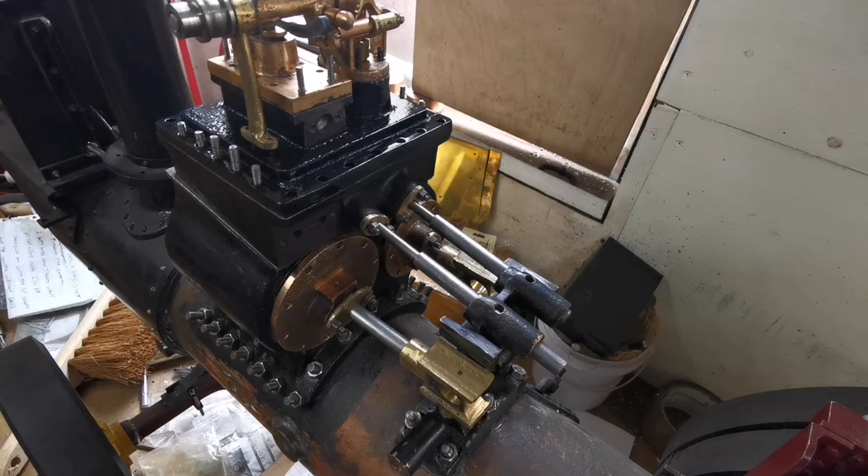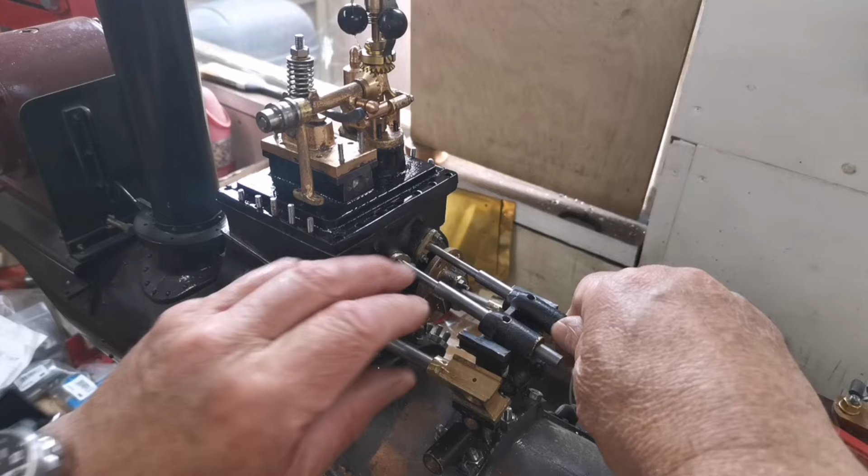Right, what I'm going to do now is make the proper valve rods. These I use to jig the weigh shaft bracket up with. So now I'll show you the drawing and then we'll see what we can do.

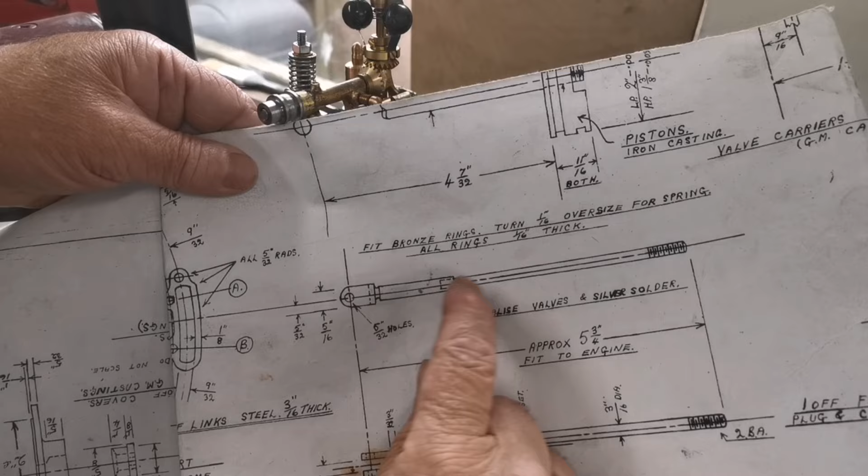Right, here's the valve rod. So what I've got is some 3/8 by 3/4, and I can make that in one piece, so there's no silver solder in there, because otherwise you've got a little bit of silver solder to join the 3/16 rod in the end of that.

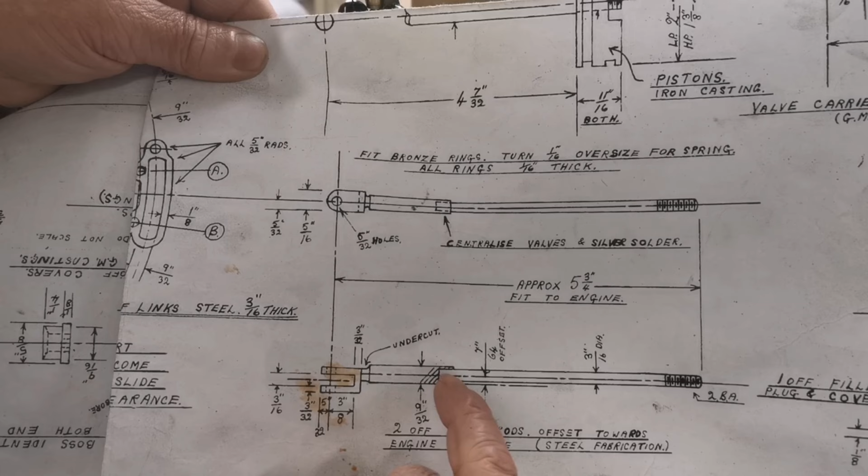So I've got to turn, I'll centre up, put my 4-jaw chuck in, centre up. I've already worked it out - if I centre up the 3/4 by 3/8 in the lathe, I can turn that 9/32 down to the right length, then cut it off, and then do that in the milling machine. So let's get going.

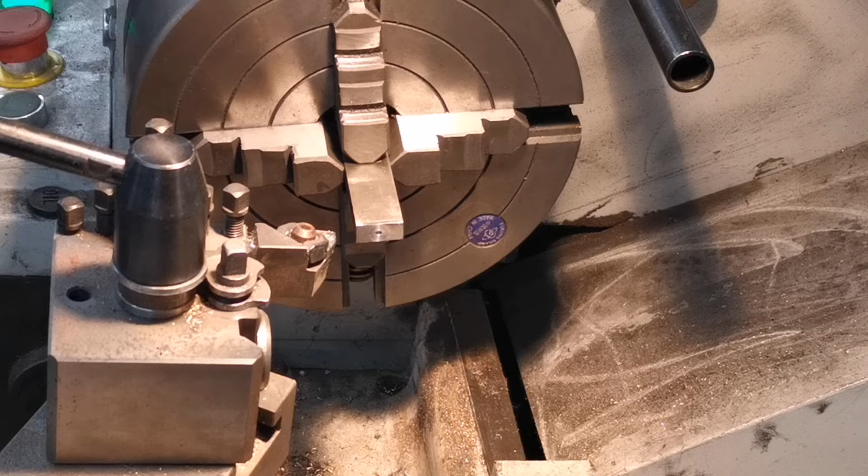Right, so I've centered up my 3/4 by 3/8. What I've also done, this one I've used as a jig - I've drilled a piece of rod and reamed it, so nice fit on that, nice sliding fit. So now I can turn this down using this as a gauge to make sure it's a good fit. So right, I've got to turn this down now to 9/32. Let's get going.

Slowly getting there now.

Look at that, a little bit of emery cloth now. Oh, that's lovely. Beautiful.

Right, next thing then, I'll drill the hole 3/16 for the valve rod that goes into the steam chest. So I'll just sort out some drills. I'm just putting a little centre drill in there.

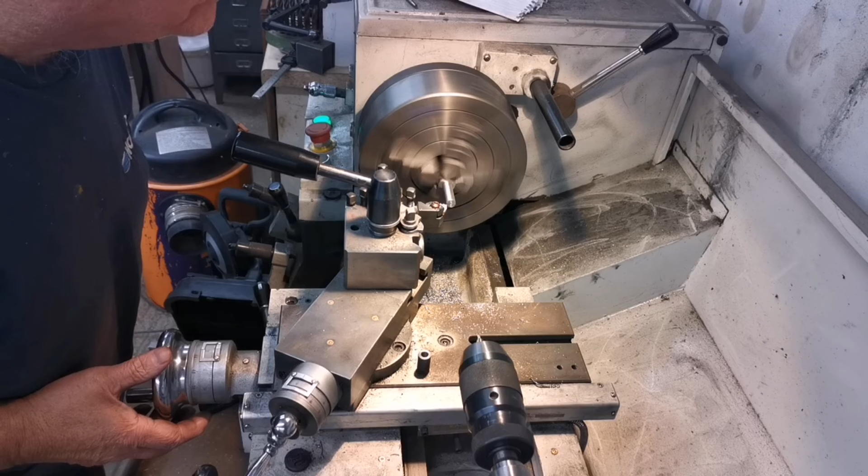The second one nearly done. That's the second one finished, drilled, lovely sliding fit on there, beautiful.

Now what I can do is get these cut out, leaving enough meat on that side of the turned part, so I can then machine this part here, which I'll do in the milling machine.

Right, so there's the two parts. I shall mount that in the milling machine that way, and then we can machine everything else now on these sides. Right, so I've got this in the collet.

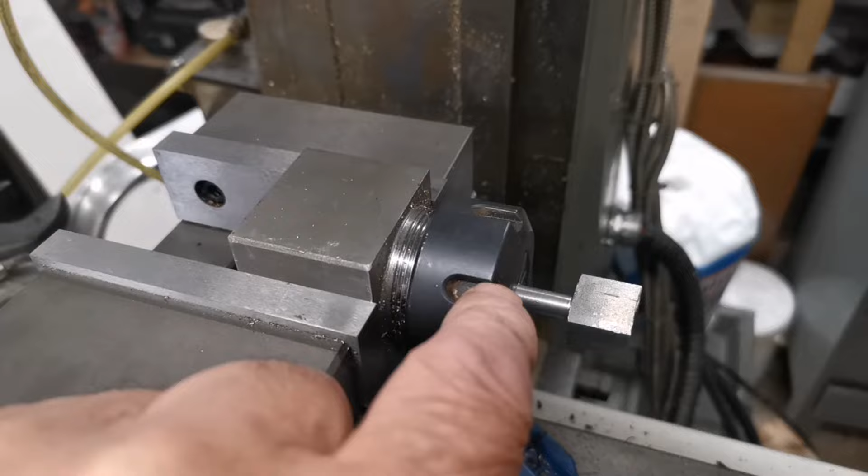On the drawing, this part now where it's flat is 5/16. So the first thing I'll do is skim each side of this - do one side, flip it over, do the other side, so that's 5/16 thick. But what I've got to do is work out where the offset is, how far down I've got to machine this side first, and then flop it over and machine that to the right width, then where the slot goes in.

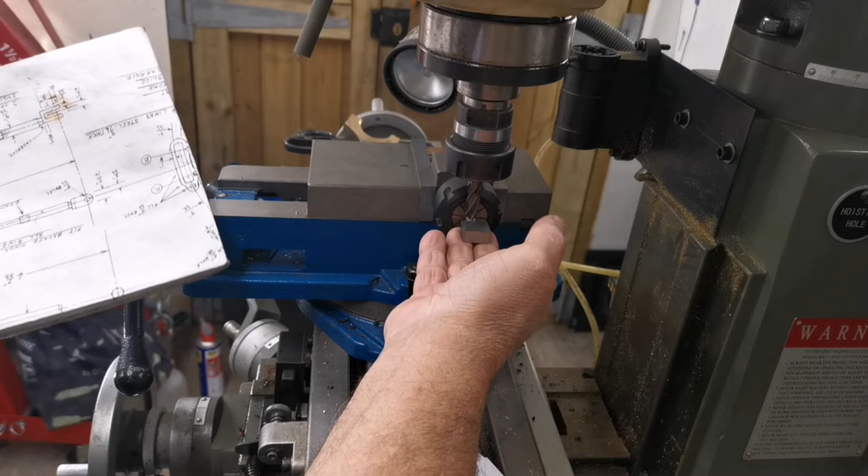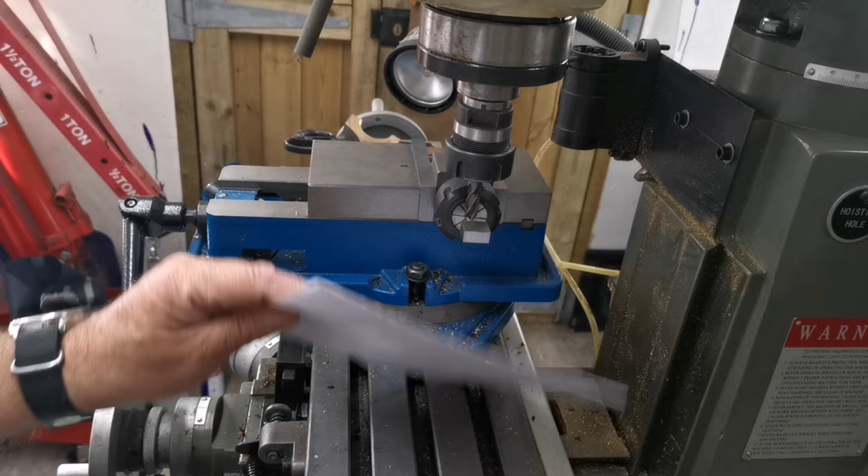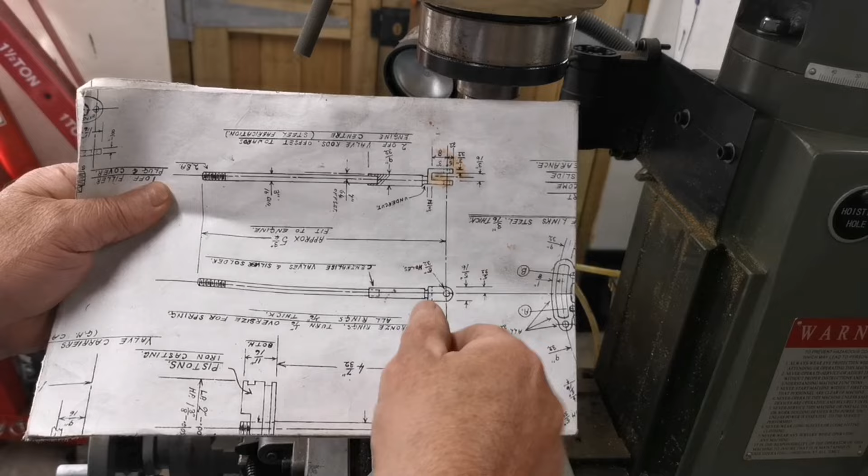Right, so I've got this set up in the milling machine. What I did, I'm going to do the 5/16 thickness there, so I've got to take a bit off this side and a piece off this side. So what I've managed to do is find the difference there. So you've got 9/32 and 5/16, which is 10/32, so the difference between the two thicknesses is 1/32 between both sides, which I've got.

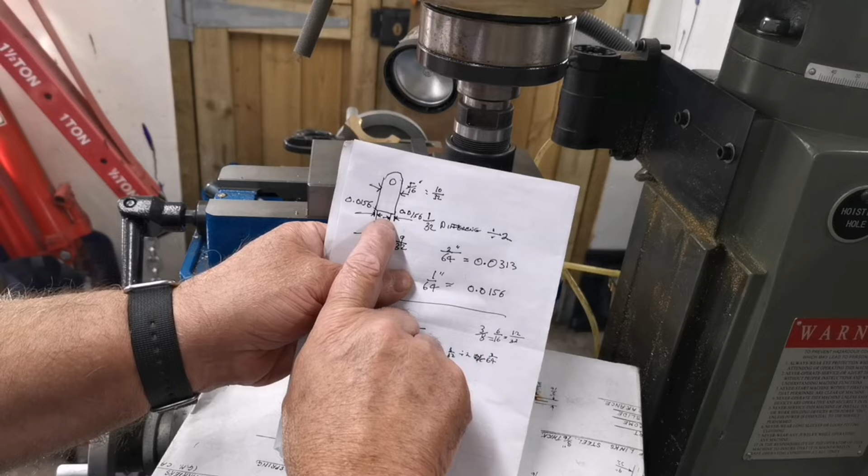1/32 is 2/64, so I want 1/64 each side, which is 0.015. So what I did, where are they - I got some feeler gauges and I've got that set at 0.015, so I should be able to skim that now. That's 0.015 higher than the round shaft there, so that should be right, and I should be able to spin that over then and do the other side. So let's get that milled off.

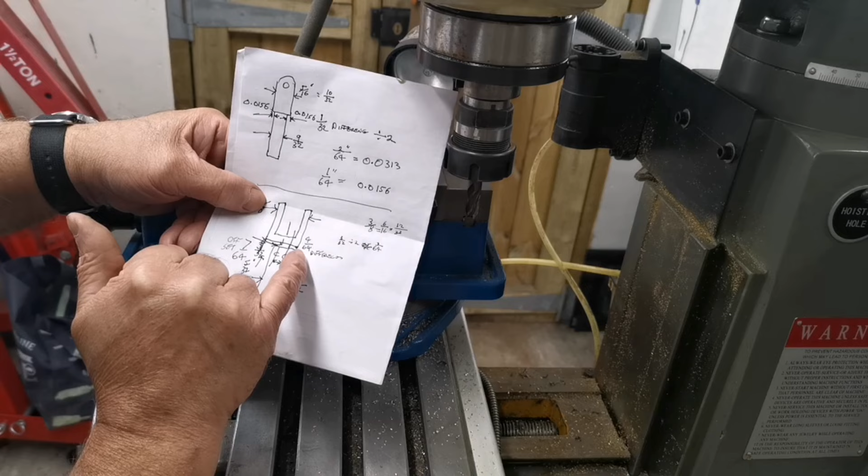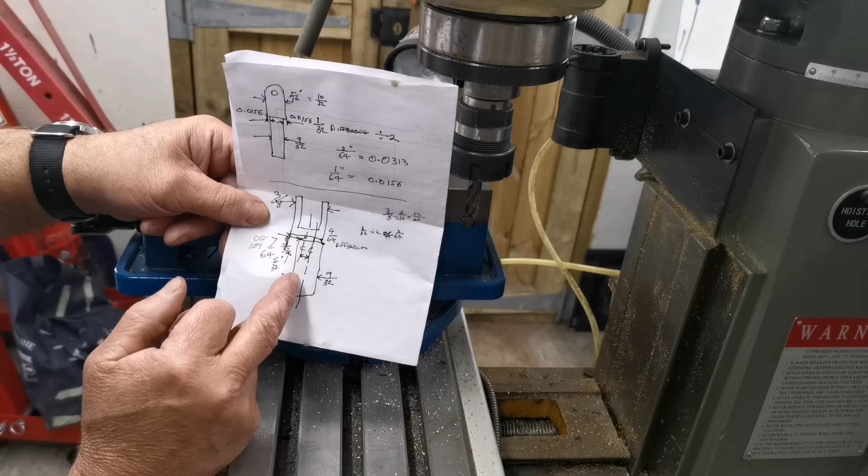I'm going to turn that 90 degrees, and I'll probably do this side first, so I've sorted out how much this is below the round and how much this is above the round. So we're looking at the center is a 7/64. From the center of that round to the center of the slot is a 7/64 offset.

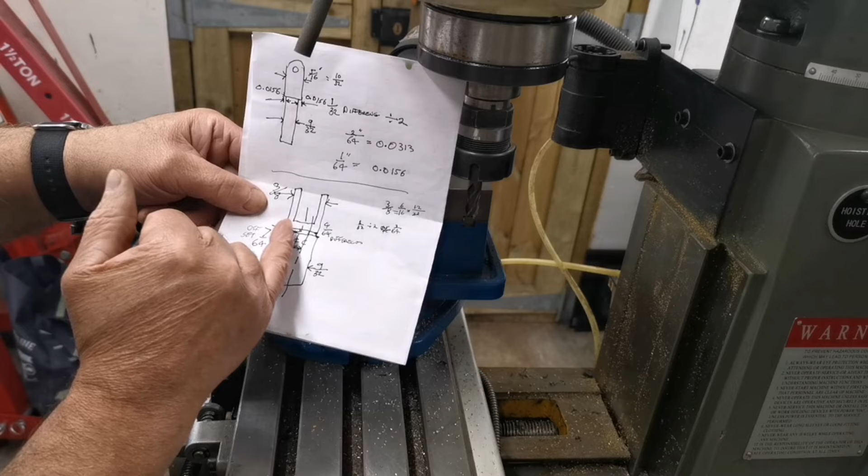So I'll just sort that out and get the right height. Right, so from the top of the round shaft to the top of where I should be, I should have 0.0156 inches left above the round shaft here. So that's what I've got to machine that down to.

Right, so I've got the right height from the round shaft to the bottom of the cutter, where that should be the right height. If I mess it up, I can always make another one.

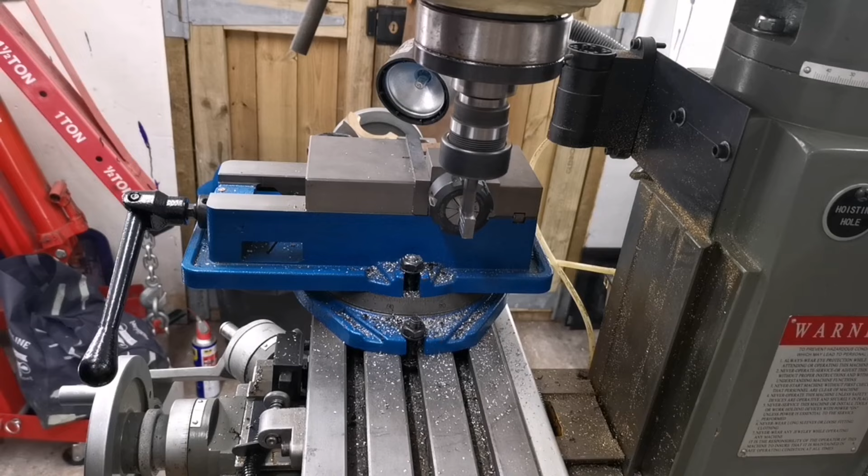Right, now I've got to turn that over and get that down to 3/8 of an inch, that's got to be from that side to down there. So I'm just going to machine that down a little bit at a time till I get my 3/8 from there up.

Sharpen my cutter in a minute. Get this one machined and I should sharpen that cutter.

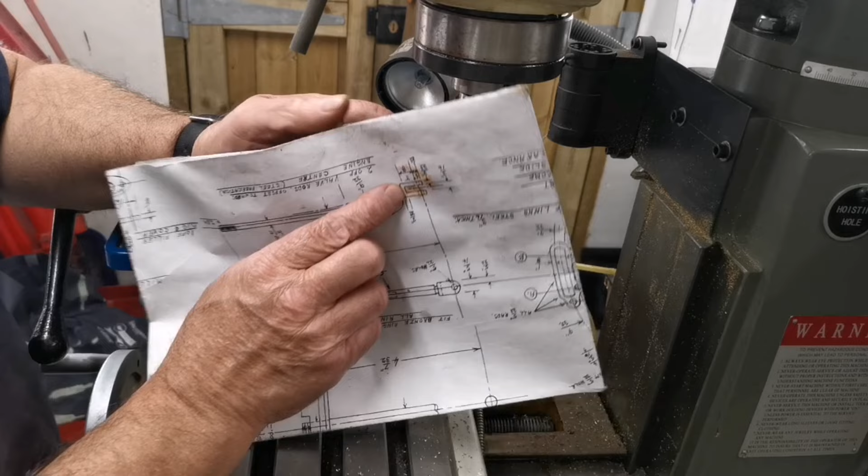I'll just take a measurement of that. A little bit more. Right, that should be 3/8 of an inch there. Spot on. Right, so the next thing I got to do, turn that 90 degrees, get that centered, and then I can do that slot there.

So that's the next job. Right, so I got this set up to cut the 3/16 slot, so that's all centred, so we get on.

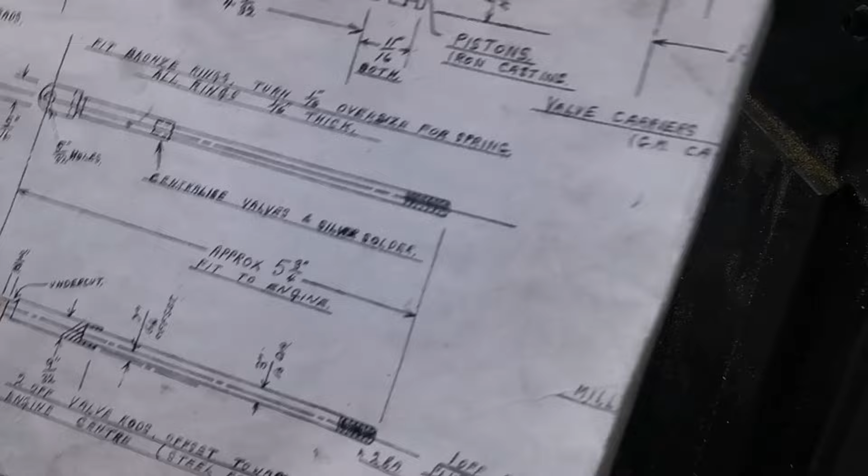Right, that's the slot done. Next thing I've got to do, turn it 90 degrees. We got the hole goes through there, and then what we do is we try and do the radius on the milling machine as well, using the digital readout.

Right, so I've got that centre and in the right distance there. So I'll now centre drill that for a 3/16 hole.

Beautiful. Right, I'll just change the drill. Beautiful.

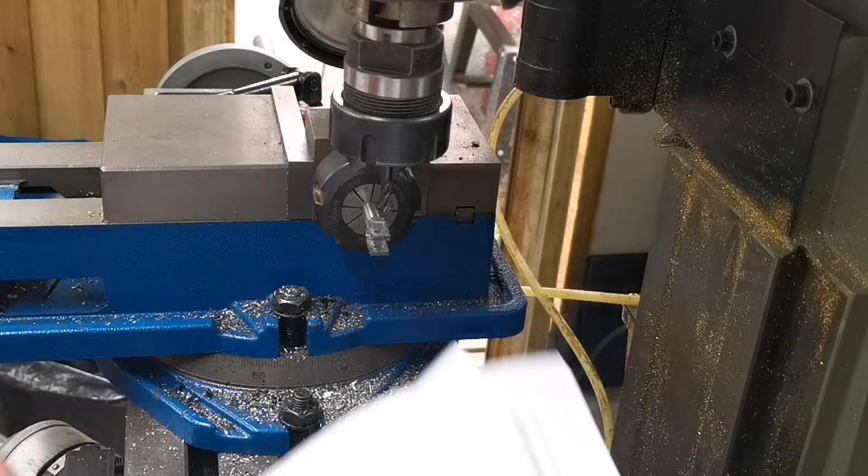Right, I was going to cut the radius on these corners using the digital readout. I did print out everything to do with doing radius, but I've tried all sorts of entering different ways of putting it in and I can't get it done. So what I'll do is I'll just file them round.

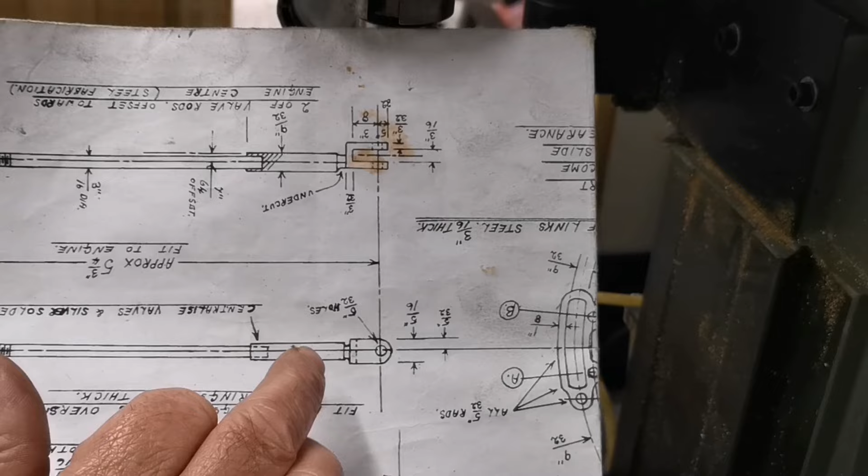So next thing I'm going to do, take that one out of there, I'll do the other one, and then we'll mount them in the lathe, and there's got to be, if you look at the drawing, a little undercut there. I didn't do that while it was on the lathe before because I wanted the whole strength there just in case it broke.

Right, so I'll just machine the other one up to that state and I'll get back to you. Right, there's the two parts finished.

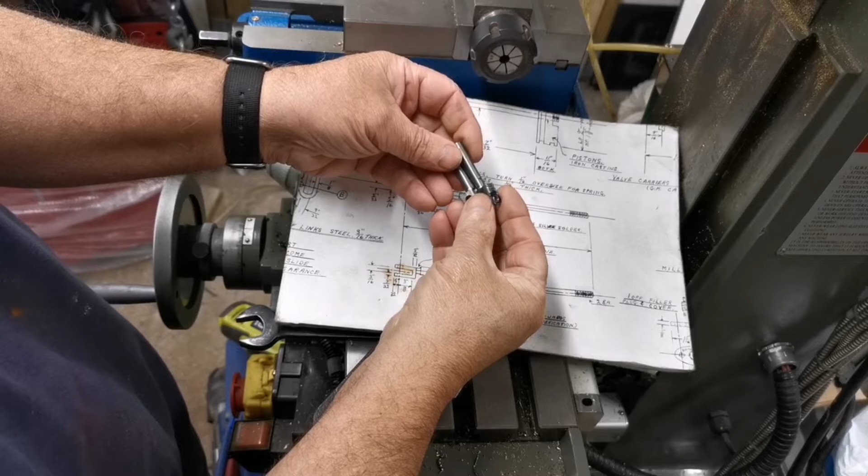Next thing, I've got to do the rod. So I get some 3/16 diameter rod, put some thread on the end, check the measurement and silver solder it in.

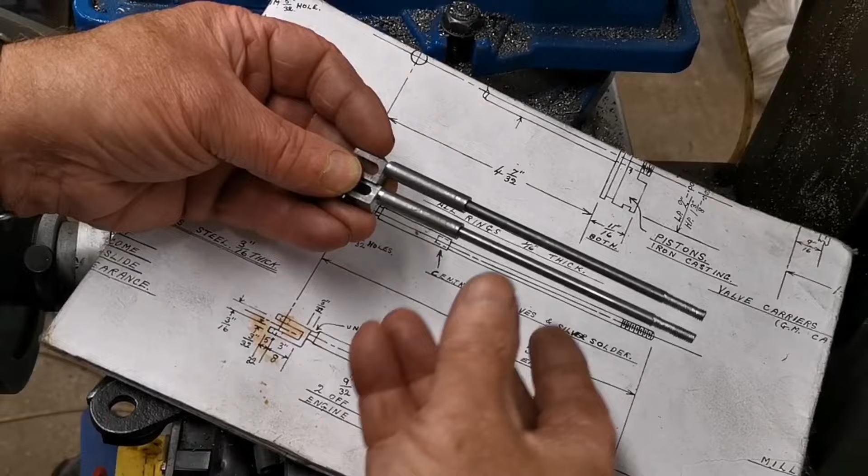Right, so that is the threaded rods done. All I got to do now, silver solder those in there. That'll be the valve rods finished then.

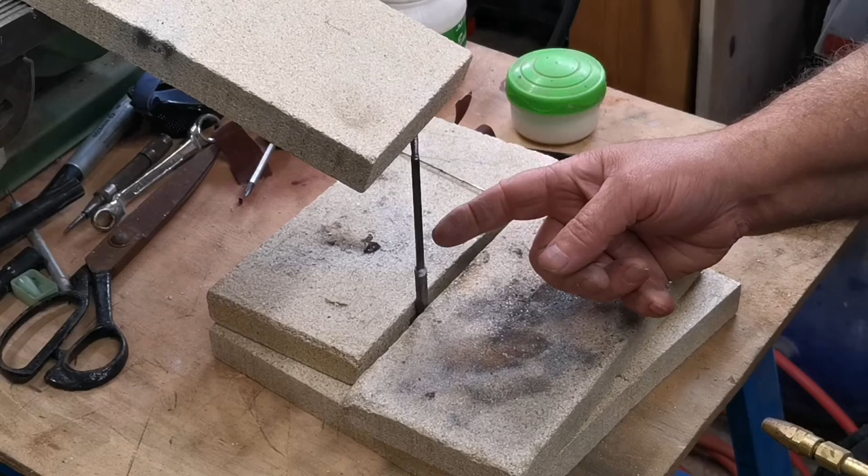Right, I'm just about to silver solder the 3/16 rod into the machine part.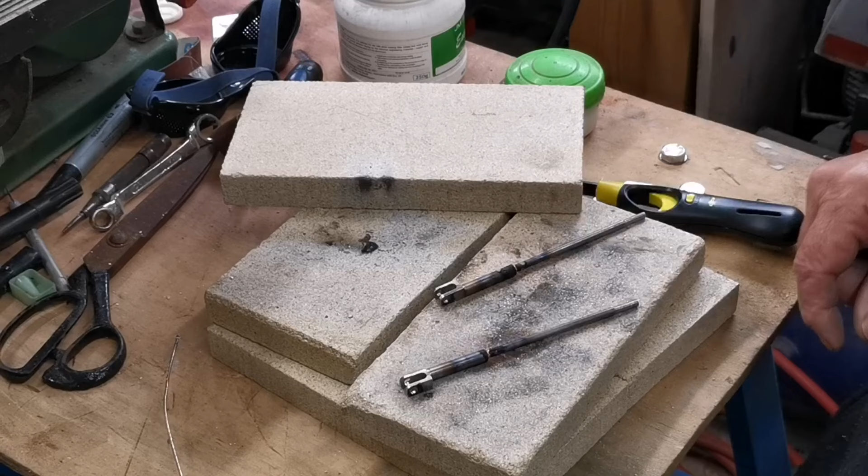There we are. Just turn the torch off, turn the bottles off a minute. Right, that's those soldered in. I did that one earlier. I'll just emery cloth round the ends.

In fact, I might just put them in the lathe with a little bit of fine emery cloth. Let's just do that. I'll be back in a minute.

So there we've got one pair of valve rods. Let's get it on the traction engine.

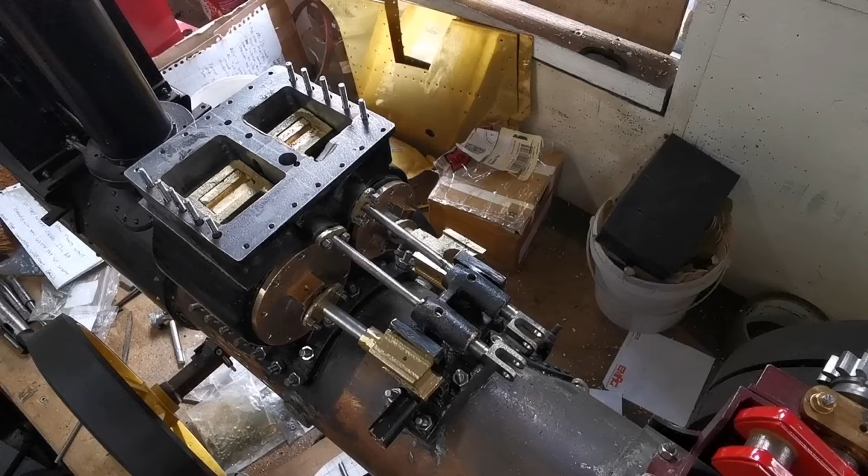Right, so I've got the rods through the weigh shaft bracket, through the cylinder head, and I have screwed the valves on, look, so they move blooming lovely. I mean, you can't tighten them up yet and put the head on because you've got to do the eccentrics and that.

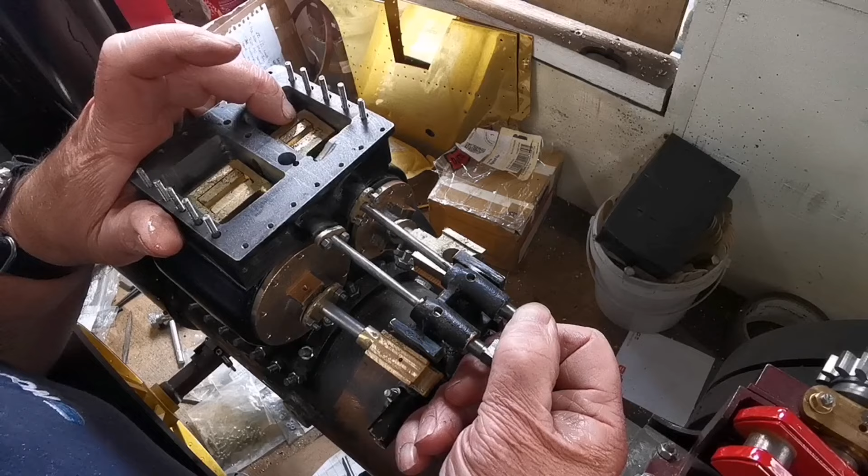So that would be to do the timing and that. So you've got bush, bush, bush. I might have to shorten them a little bit. Oh, I don't know, that's...

Might have to shorten the thread on there a little bit. Because that's just uncovering that steam hole there. And then that's uncovering the steam hole there. So I reckon I could take off a little bit.

But yeah, I'm really happy with those. They both slide in and out nicely, look. So that means I've got the weigh shaft bracket and that jigged up just right. Beautiful. So I'm really happy with that. Great.

So I put the cylinder head back on, look. That moves lovely. I'm really pleased.

So I think the next job I'll do now is I'll do all the studs for these. Get some piston rings, that's got to be fitted onto the shaft, and then I can do the slides. The angle slides each side.